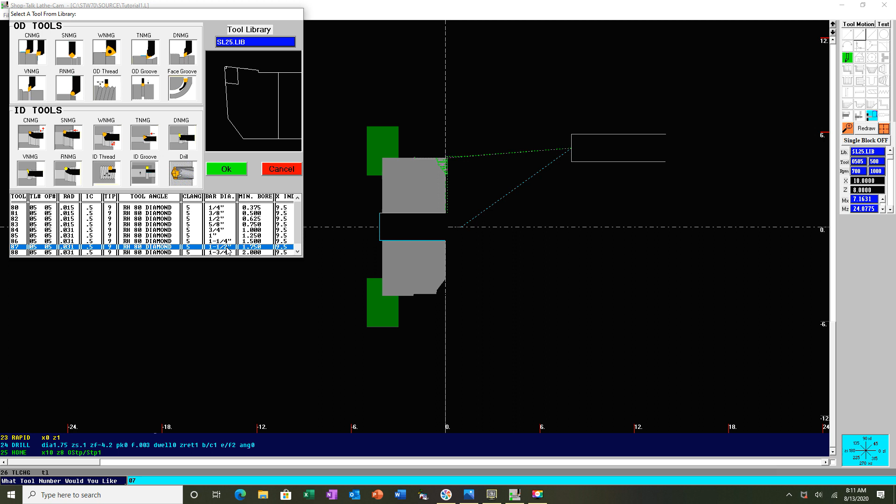So you may want to go to a 1 1/4 bar, or you may want to stick with the 1 3/4 bar, and it will bore the clearance that it needs. And if you don't run the RPM too fast, then you may not have any problems. For demonstration purposes, we're just going to pick a 1 1/4 bar. And we'll select OK. And again, we're going to go through the process of selecting our tool.

I'm going to put this on tool number 7. I'm going to use offset number 7, a tool tip type 9. And I haven't really described to you as yet what all the tool tips are, and I'll show you that here shortly. But basically, when you pick a tool from the library, you should never change that tool tip number unless you really know what you're doing. The tip is set from the tool library. It knows that's what type of tool that is. Basically, it's how it calculates the cutter comp based on the tool tip number.

And I'm going to give it another X10, Z8, tool radius of 31, max spindle speed. Again, I'm going to limit it to 1,000. I'm going to run it at 500 surface feet, spindle forward, 254, and using the CNMG 432. That should be a 1/2 inch IC insert. And I'm going to change my text comment here to say, I'm not going to rough and finish. I'm just going to do a roughing operation. So I'm just going to tell it rough the bore.

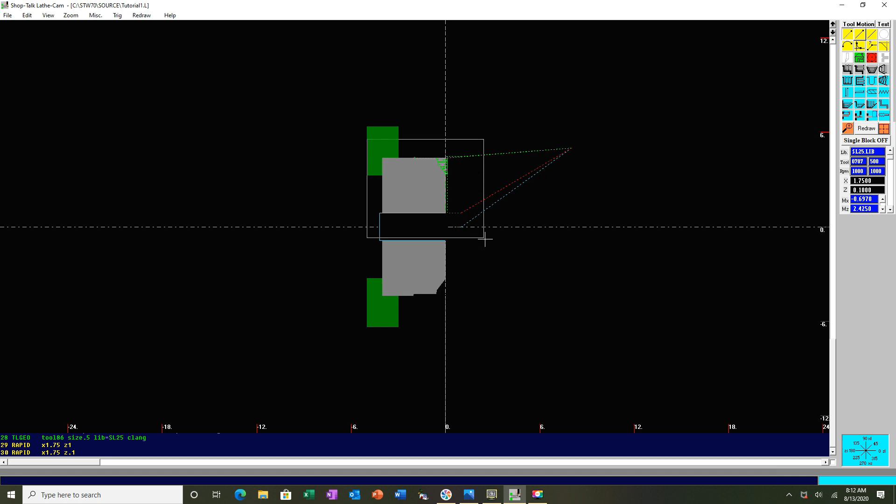Now I have my roughing tool sitting up here at this index position, and again I need to rapid it down into here so I can begin roughing. So I'm going to firstly select the rapid command, and I'm going to rapid it to X of 1.75 and Z 1 inch. Then I'm going to rapid it again up to Z 0.1. So that kind of gives me a safety move to here, and then a move to here that I can start now stepping it off this process here.

So again, just like we did the roughing operation on the OD, I'm going to start by doing a rough turning cycle again, which is not only rough turn, it also does a rough bore. So you can just do a rough turn, which is going to output another G71 cycle. Start from 1.75, Z.1. Again, the stock right here, be careful when you select stock, because stock can be plus or stock can be minus.

It knows you're doing a bore, so it automatically took your default of 20 thousandths that you like to leave for finish pass and converted it and tells you, well, since you're on the ID, you probably want to have minus stock, which would be correct.

I'm going to leave 20 thousandths in the minus direction, plus 5 thousandths in Z, the depth of cut, let's go with 100 thousandths per cut, retract amount, and the feed rate again.

Okay, once I have turned on the rough profile cycle again, the method is you program the finish tool path that you'd like for this particular shape to draw.

So I'm going to go back over here to my picture, and I can see my first diameter that I'm going to do right here is 6.52 plus 15 thousandths, so 6.535.

During a roughing operation, sometimes if I have a big radius or a chamfer, I might want to chamfer this little corner right in here with this roughing cycle, but sometimes it's irrelevant because I'm only going to put maybe a 10 thousandths radius or a 15 thousandth chamfer. I can do all that in my finishing operation.

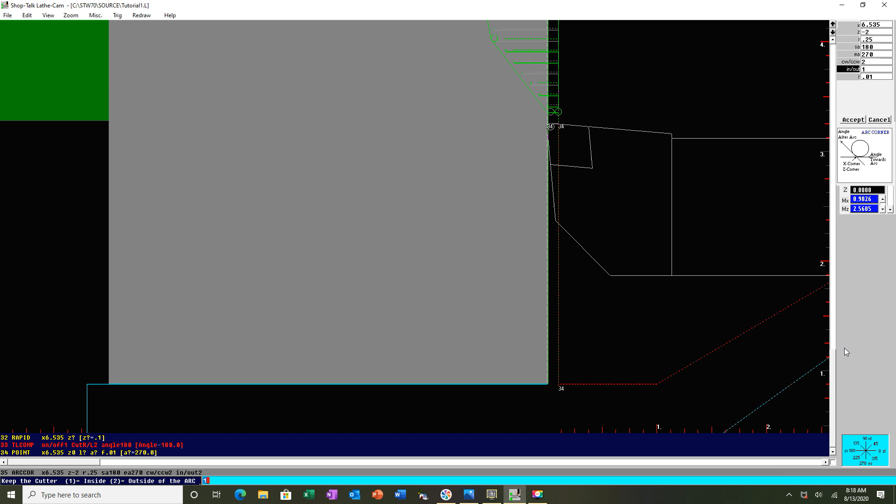And then at a feed rate, it's going to generate a line, a circle, and another line. This is typical - it's going to show you a full circle right here. Once you do a redraw and tell it the next point, it will actually trim this circle for you.

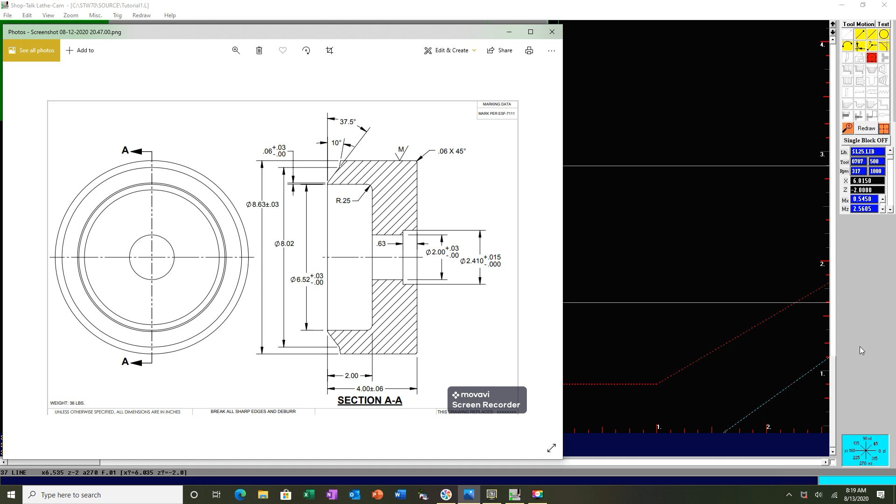So my next point from here is to come down to some new diameter. That new diameter is to come down to x 2 inches plus half my tolerance, so it would be 2.015. So I'm just going to tell it point, X 2.015, Z stay at minus 2 inches. I'm going to be traveling 270 at a 10 thousandths feed rate.

So it's going to make it move down to here. And again, if I do a redraw, you'll see now it's actually trimmed the part.

From here, I need to bore through my part. I'll go back to point, stay at 2.015, minus 4.1 let's say, at an angle of 180. That'll bore it completely through my part.

And then I'll move down - I never leave my tool sitting on the part shape. Always make sure your last move is a move away from your part material. Whether it's on an OD, you can move up. If it's an ID, you're usually going to make a move down.

So I'm just going to tell it point, move down to some dimension. In this case, let's go with 1.75, minus 4.1, angle 270. I'm just making a straight move down in this particular case.

Again, what I want to do now, since there are no more points, is I always end it by selecting the tool comp so that I can look at the tool compensation path and make sure I got the arc radius correct and that the tool path is on the correct side of my profile.

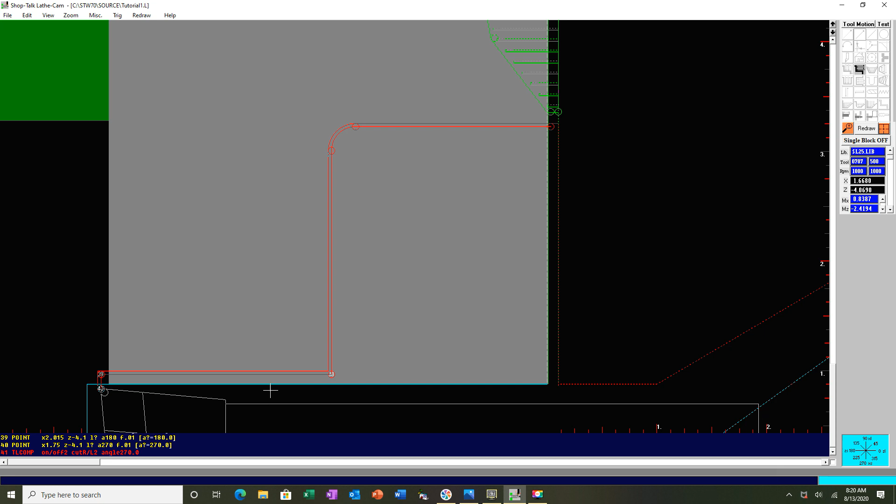Okay, here's my tool path. Yep, it's on the inside of this radius is where it's going to go. I can see my tool path is correct in the roughing cycle, and it will begin the roughing operation.

And again, I can slow it down a little bit if I wanted to, to watch the whole thing. It's a rough turn. There's my drill. There's my rough bore.

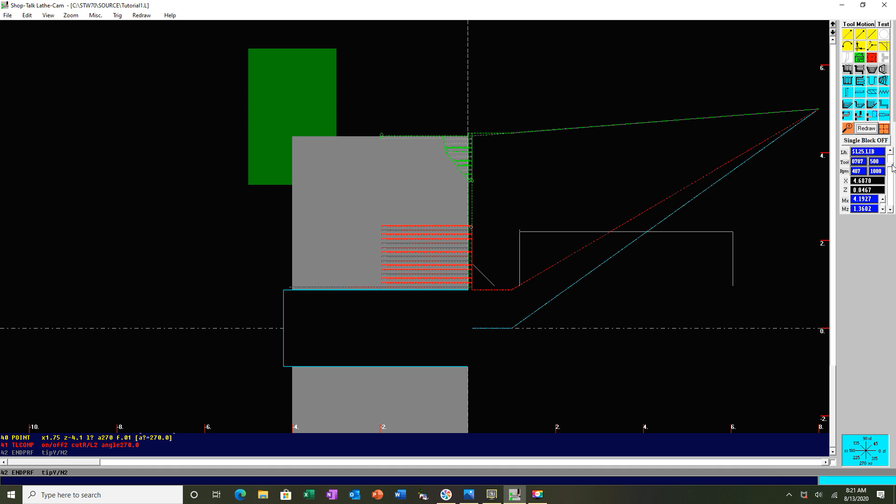Okay, the only thing I have left to do now is send this tool back to home. So I'm going to select the little house, which is home. Go back to X10, Z8, Op1, optional stop. I can just hit accept - accept all the defaults and send it straight back home.

All right, that's the end of our third tutorial and how to do a rough boring operation. So stay tuned for the next operation - we're going to start doing some finish work.